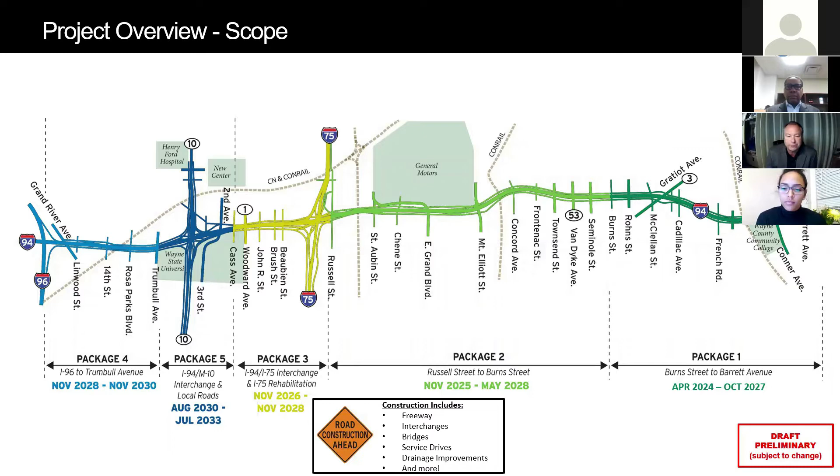Another important thing is our drainage improvements. We want to make sure our drainage is state of the art and meets the needs of the future. We've been working closely with drainage agencies to put together a collaborative, state of the art drainage system for I-94 and the adjacent roadways.

What this shows is the importance of what we're doing. I-94 is really a safety project. If you've driven this corridor, you'll notice narrow shoulders both inside and outside, and very short deceleration and acceleration lanes. It can be difficult for motorists to merge with those short entrance lanes, and the weaving motions cause congestion. So we want to make this section of roadway safer.

It really is a safety project, because it has served the Detroit area and commerce well since the 50s, but now it's an outdated design. We're bringing it up to current standards to make it safer, with wider shoulders, longer acceleration and deceleration lanes, and better geometrics so that traffic can flow easier.

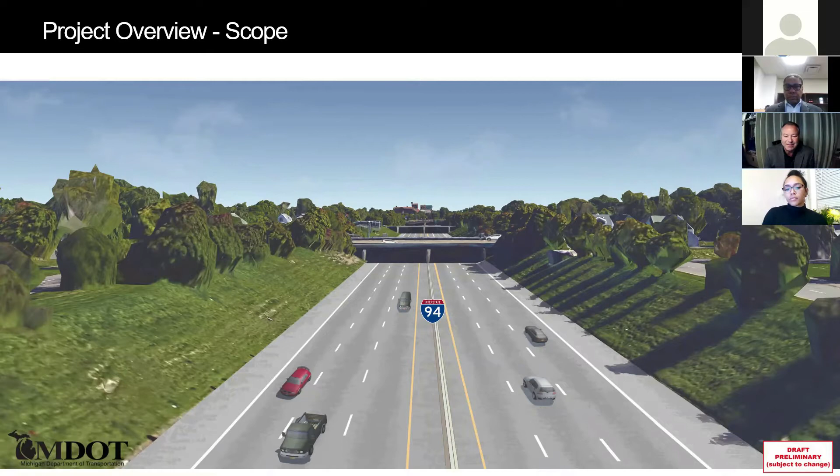If you click on that, you'll see what the future freeway will look like, with lengthened entrance and exit ramps and widened shoulders. A key part of this is we wanted to minimize any impact to the area where this roadway is. So we're actually able to provide additional capacity by adding another lane - four lanes in each direction when we're done, with wider shoulders and lengthened ramps - without really making the footprint of the roadway any wider.

We're achieving that through construction of retaining walls. We're removing the earth and building the retaining walls, which gives us space for the additional capacity that's needed out there, since there's a lot of congestion. The roadway ends up safer within the same footprint. That was one of our goals, and we know we've met it as we move forward.

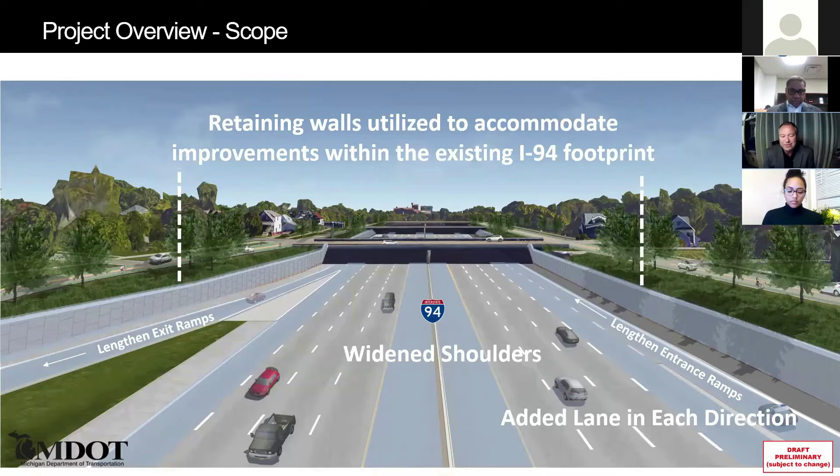So we've been at this a long time. We actually started with our advanced bridges in 2014, with Gratiot, Van Dyke, and Woodward among the earlier bridges, and we're continuing that. Those were the bridges, as Nate said, that were in the most need of work, so we got on those, and that's continuing right now with advanced bridge construction - Grand River is one of those bridges.

We completed that recently. We have ongoing property acquisition taking place right now, and then we move right into construction of our first section, the Burns to Barrett section I mentioned on the eastern end of the project. Then we're going to march on down the freeway, rebuilding I-94 from the east to the west.

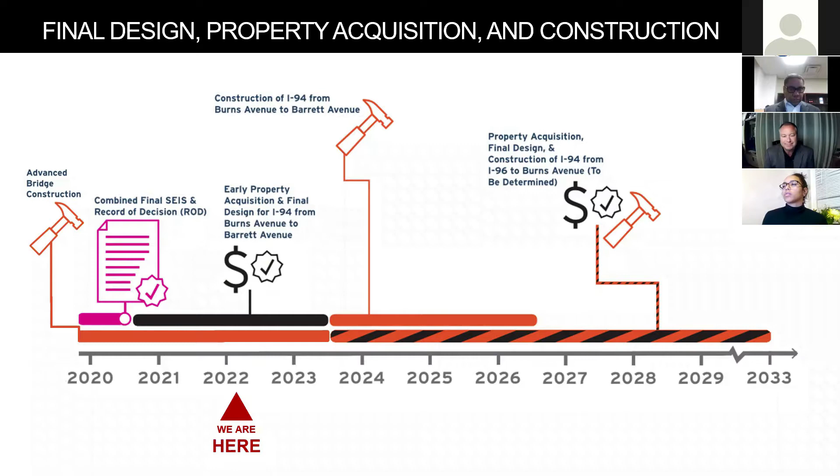It's an old roadway in need of reconstruction. We certainly want to maintain local and regional mobility during construction. That's a very important part. Everybody needs to get where they need to get to. We want to build the project, but we want to make sure that we maintain mobility during construction, so we're striving to do that as best as we can.

We want to award contracts to support the first project in 2024. That's our goal, we're moving forward on that. We have a final designer under contract, nearly under contract, to do that for the section. And of course, deliver the project within budget.

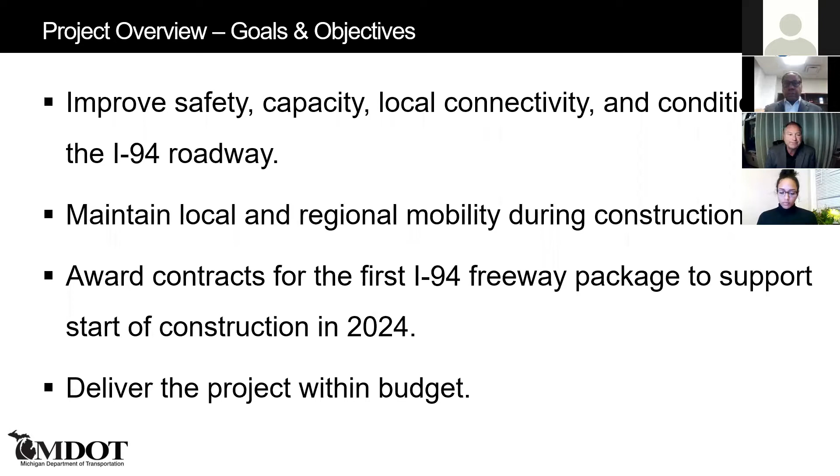Next slide please. Here's one of the things too, we're using I-94 as a means to really provide opportunities for small businesses. Throughout the Advanced Bridge project and on to the major construction work, we've been working to engage small business contractors and mentor them, giving opportunities for small businesses, both in the consulting area and the construction area, to work with more established construction companies, contractors, and consultants to gain experience.

So we've been doing that. It's been very successful. There's been many small businesses that have grown as a result of what we've done so far, and we're going to continue with those successes. It really has served us well to increase the technical ability and business knowledge of small business firms by working together on this large team. This project is a large project with a lot of different consulting firms and a lot of expertise out there, all working together. It's a great team, and there's a lot to be learned by many different firms of all sizes.

And with that, I'll hand this over to Andrea Wilcox, who will talk about specifically our advanced bridges that we've worked on so far, and then focusing on our Grand River Bridge. Thanks, Andrea. Thank you, Terry. My name is Andrea Wilcox, and I'm a project manager at the Detroit Transportation Service Center.

And this is the I-94 Advanced Bridges schedule. As you can see, most of the advanced bridge work has been completed - that's the bridges in gray on the left side of the screen. This work was planned to be completed prior to the mainline freeway construction starting. So far we've constructed 11 bridges from 2013 to 2019, and we removed 1 structure, which is the 3rd Street bridge.

We currently have 4 bridges under construction - Cadillac, Frontenac, and Burns - that started in 2021 and will be completed this spring in 2022. The 2nd Avenue Bridge will hopefully be completed this fall. We're going to be starting construction on Grand River Avenue this year, and the Cass Avenue Bridge replacement scheduled for this year cannot start until the 2nd Avenue Bridge is complete.

We currently have 2 railroad structures in this Advanced Bridges program, scheduled to be completed in '23 and '24. That's the anticipated construction. We also have two other active transportation and demand management projects - one on the I-94 freeway, and that system is in place and currently operational. The other is on Gratiot and Michigan Avenue, starting this year and completed in 2023. This project consists of signal upgrades at 42 locations on Gratiot and Michigan Avenue.

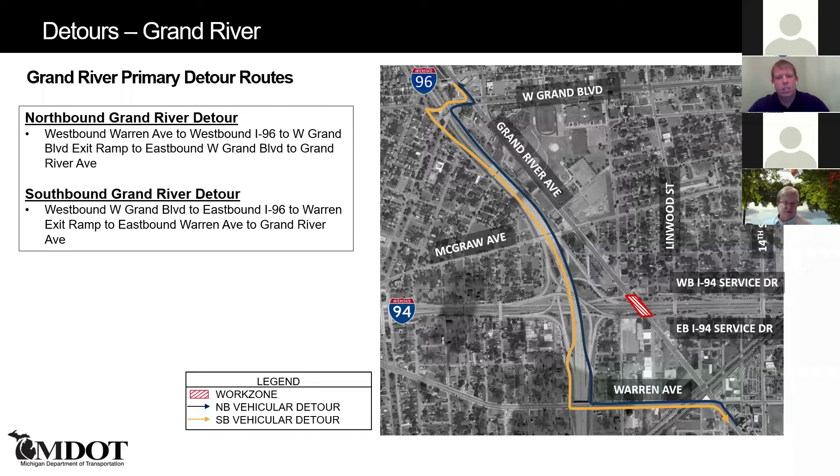This sheet shows - the last detours I was talking about were really for traffic trying to get through the area, more regional trips. There will be a secondary, local detour set up for anyone really trying to access this part of the city between Grand Boulevard and Warren.

It's important to note that on Grand River, DDOT has one of their major routes. DDOT will be sending out communications to their users and riders about the rerouting of this route and changing of stops, but it's more than likely their buses will follow a route similar to what we've shown here. This is really just for local traffic.

These streets here are very narrow and not conducive to trucks and other larger vehicles that could be on Grand River. So as you can see, they'll be crossing 94 via Linwood, which is the street just to the east of Grand River.

There are also other options along the city in this area - just to the east of that is 14th Street, or Rosa Parks, and Trumbull. So there are several opportunities to get across 94 for anyone familiar with the neighborhood and living in the area, but this will be the posted route out there with signing.

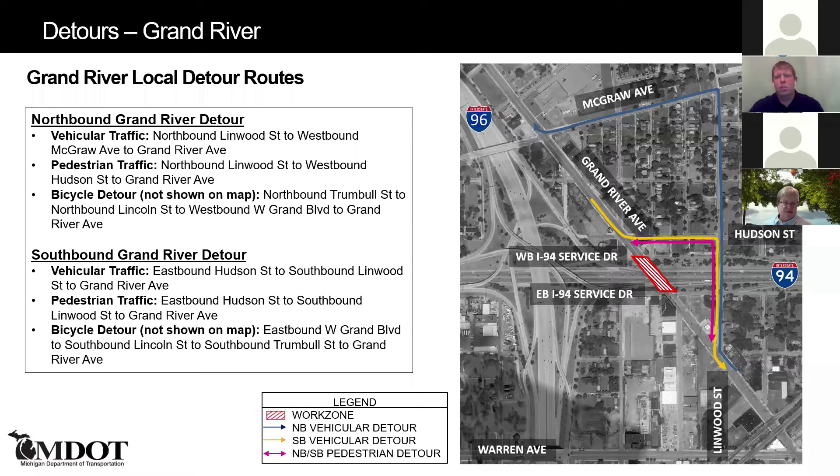Now we're going to start talking about some impacts on I-94 itself and on the freeway. While the bridge is being constructed above 94 on Grand River, 3 lanes of traffic, which is the existing travel pattern on 94 in each direction, will be able to be maintained during all the peak hours - that's for your morning and afternoon commutes and the majority of the weekdays.

There will be times during off-peak hours, so it could be nighttime or maybe middle of the day or weekends, where there might be single lane closures in place. That's just to allow the contractor additional area to bring in trucks, bring in materials, or do other construction activities that require extra workspace.

So while we are maintaining those lanes on I-94, there is going to be some impact to some of the ramps as we're shifting traffic to the outside or inside. These are some of the ramps that will be impacted.

The first one here, your eastbound I-94 exit ramp to Grand River - if you're trying to get off at that ramp, there'll be detour signing out there coming from the west, heading eastbound on I-94, to either exit Warren Avenue if you're trying to stay south of I-94, and if you're trying to get to the north side of 94, you'd be directed to take I-96 up to Grand Boulevard.

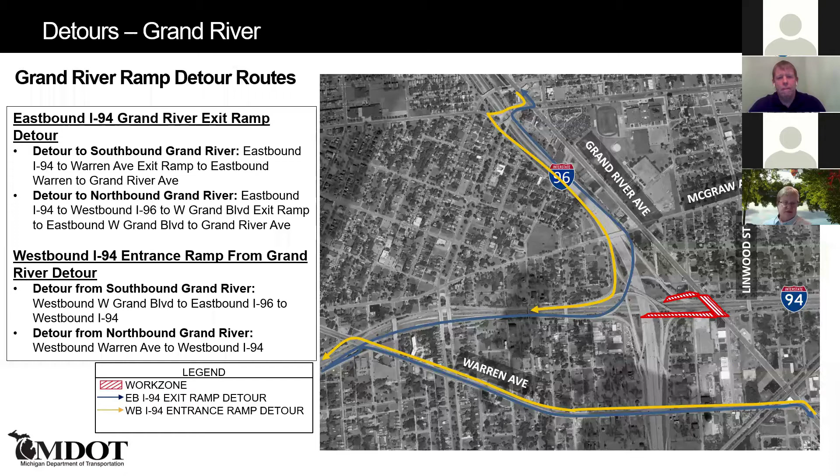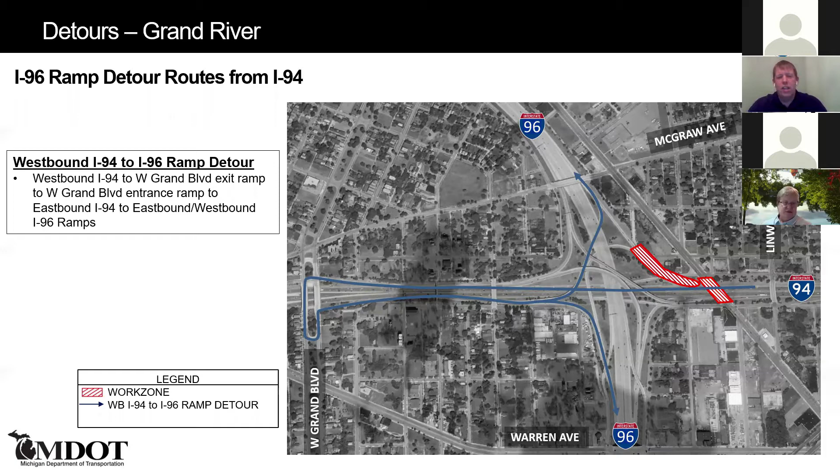So this is another ramp that will be impacted with the construction, being able to maintain those lanes on I-94. This is a ramp that'll need to be closed, and this is the exit ramp to I-96. So both the eastbound and westbound I-94 to eastbound or westbound I-96 will need to be closed. The detour for this is just to stay on I-94 past the ramp you'd normally exit at. You'd exit at Grand Boulevard and then re-enter the freeway heading east, then catch the I-96 ramp as you approach I-96, and you could either take that to westbound or eastbound I-96.

All right, this one might be a little harder to see, but the areas there, you can see Grand River labeled, but the red and white areas are showing the ramps basically coming from I-96 to I-94. So this is eastbound and westbound 96 to 94. Those ramps will be closed as well for the construction. The detour route for the westbound I-96 ramp would be to just stay on 75. If you were trying to get to 94, stay on 75 and follow that around to get to I-94. Again, if you're coming from the north side or eastbound I-96, you would continue south and jump onto 75 and get over to 94.

And then the last one here we have is for the construction of the Grand River Bridge. There will be 3 times during the construction where the freeway will have to be shut down. The reason for that is when we're demoing the bridge and also setting the beams. So the first closure will be when we're demolishing the Grand River Bridge, and this will happen over a weekend, so the freeway will be closed late Friday night and be open again early morning by Monday.

The first one is, why are the pedestrians protected by a planter barrier, but not the cyclists? So if we could go back to that slide, Mark, Andrea, Terry would like to take that one.

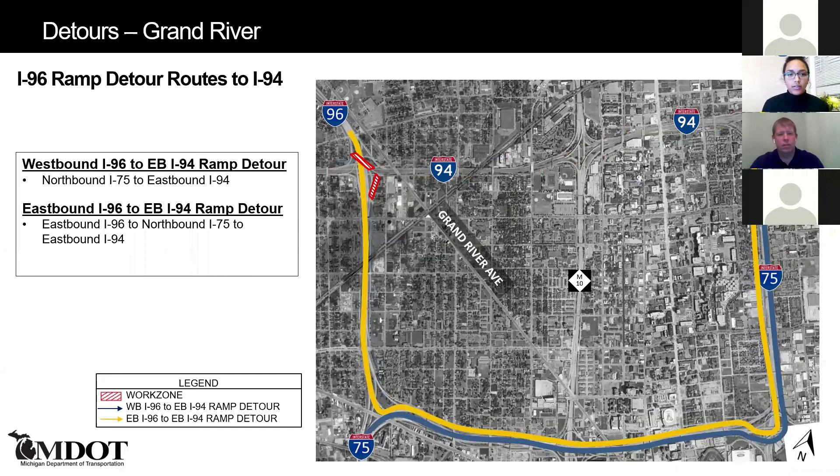I can take a stab at it if anyone else from the project team wants to jump in. This cross section was developed through meetings with the City of Detroit and the planning group there. I guess the reason partially is the entire corridor, so we're still matching up with what the Grand River corridor has north and south of the bridge, where right now it's just a striped bike lane. So we don't want to add a new fixed object on the bridge structure without the entire corridor being set. The option is that the bike lane could be used for a different type of treatment, so if it wanted to be like a bus rapid transit lane, if that was to be added to the corridor, it basically gives more flexibility on the bridge that is going to be in place for many years, rather than setting a barrier on there right now.

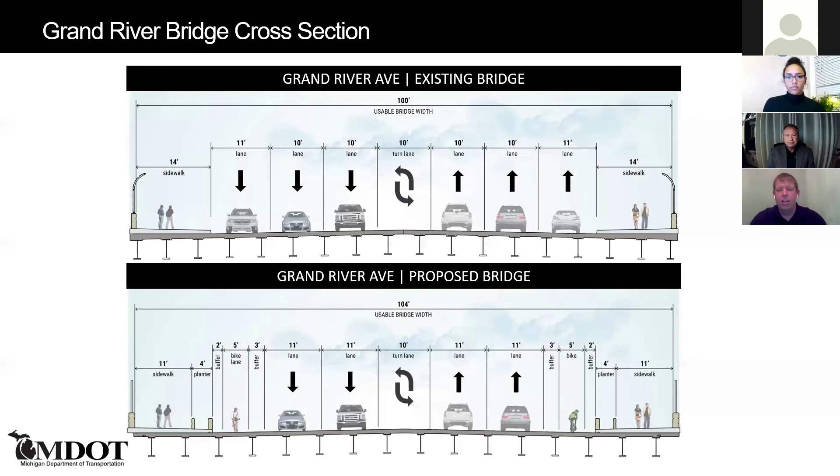I'll jump in—take it. Oh go ahead, Mark. Okay, I guess for your first question on the Gratiot signal improvements: the signal improvements are on Gratiot and Michigan Avenue from downtown, the central business district, out to I-94. There was talk on Gratiot of carrying it out to 8 Mile, but that is outside the limits of this project, so we weren't able to get funding established to carry that out further. We'll note that those signals are still owned by MDOT, and they can adjust the timing plans and coordinate those with the system we're installing, so the progression on those would still be good up to 8 Mile.

Your second question on the reconstruction on I-94: the first freeway package that would be coming out would be maintaining 2 lanes in each direction. So there wouldn't be a full closure situation—traffic would stay on their respective bounds, no crossing traffic over to the other side. Everyone would just be shifted inside or outside depending on whether we're working on the median or the outside of I-94. But 2 lanes will be maintained during construction in each direction.

I'll add to that too—on Gratiot, Michigan, that's the exact reason why we're upgrading the signals and making traffic flow better along those routes, to help mitigate any backups and facilitate traffic movement during the construction of I-94. We're doing that intentionally to give motorists an alternate route so they're not caught in the construction itself, so we see that as a very positive thing. On the eastern part of the project, we don't have a good detour route, so we're going to maintain traffic on the freeway itself. But as we move farther west, there are alternate routes, and we may consider a complete closure for the exact reasons I mentioned—we're completely closing the Grand River Bridge.